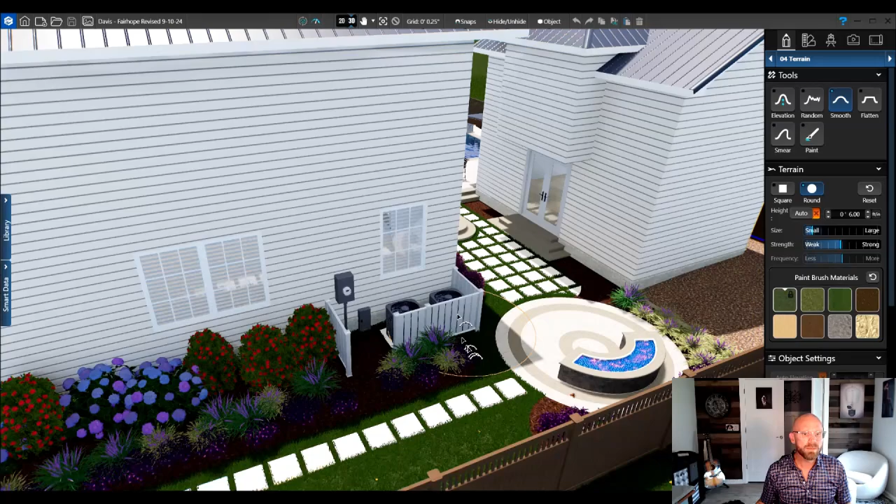Jeremy here again. I am going to show you how I would fix the terrain. I just want to make sure that you understand what that means ultimately.

So you already have these steps built here. Pulling up the terrain so that you don't have steps to come down into this area is going to cause you to lose those steps. And if you're fine with that, that's completely fine.

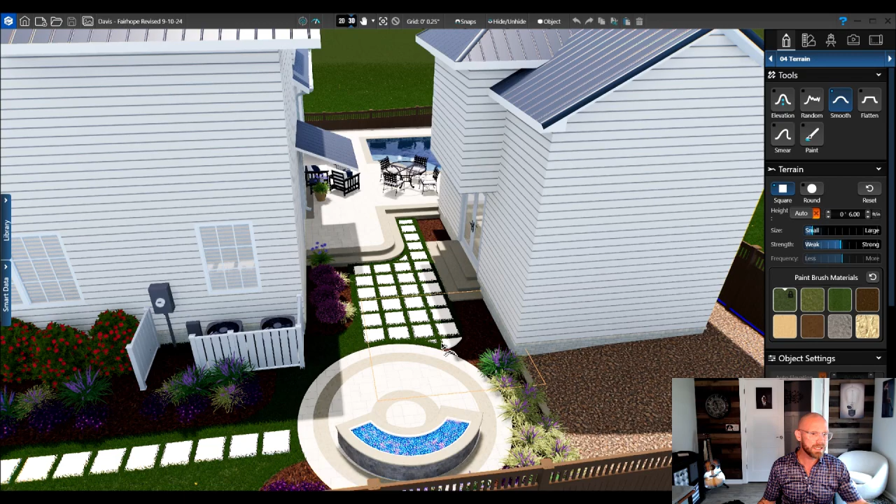But I just want to make sure that you understand what that means. Otherwise, you would have to have some weird retention wall in here, and at some point you'd still have steps coming down. So if you're okay covering up these steps, which I think are beautiful, then that's fine. I'm sure Tommy would have no problem backfilling that area and raising the elevation to match.

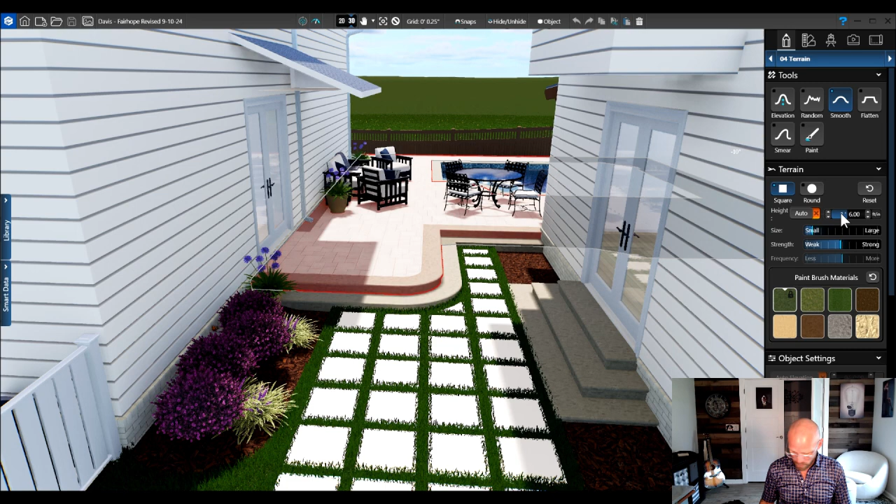So this is what I would do here. If we look at hardscapes, let's look at the elevation as 1 foot. I'm going to go back to terrain and set my terrain tool to 1 foot. And let's go a little bit bigger here. All right, so now what I'm going to do is just raise all the terrain in this area to 1 foot. All right, so there we go.

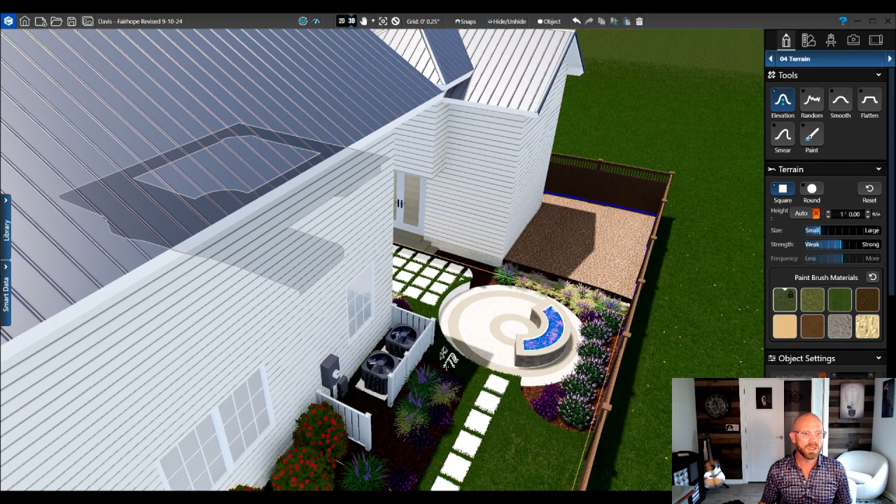And then everything will come up with it. And then this side yard will end up having to slope a bit, but we can smooth that out. So this side yard will slope down, and I'm just kind of smoothing out the terrain right now.

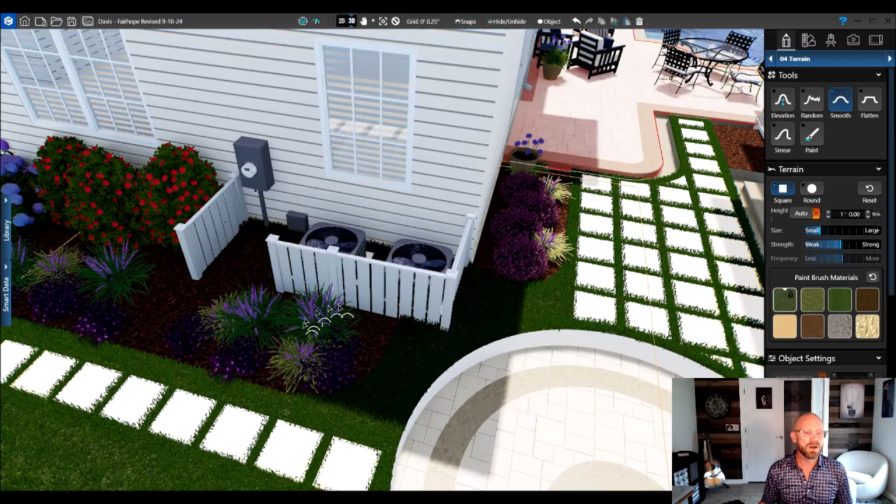The other issue is the fact that if you pull the terrain up over here, then you're going to have an issue with the air conditioning units, if that makes sense. Because we cannot change where the air conditioning units are, we can't bring those up with the changing terrain.

So now that I'm looking at this, what I'm going to have to do first of all is, you're going to have some steps over here, and I'm going to draw it right now with you kind of watching so that you understand what that means.

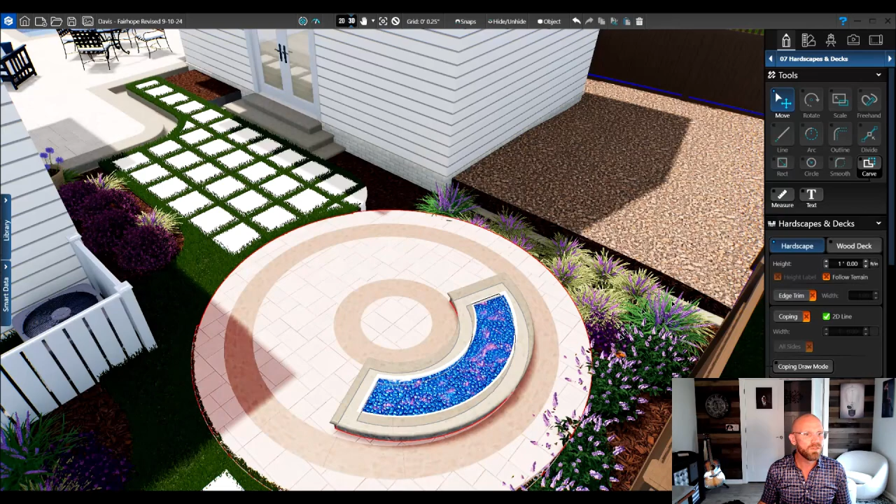So if we go hardscapes, first of all, I'm going to bring all these hardscapes up to that 1 foot elevation. I'm going to bring this up to a foot, and then all the planters, of course, are going to have to come up as well, and everything with it. So we would just follow terrain there.

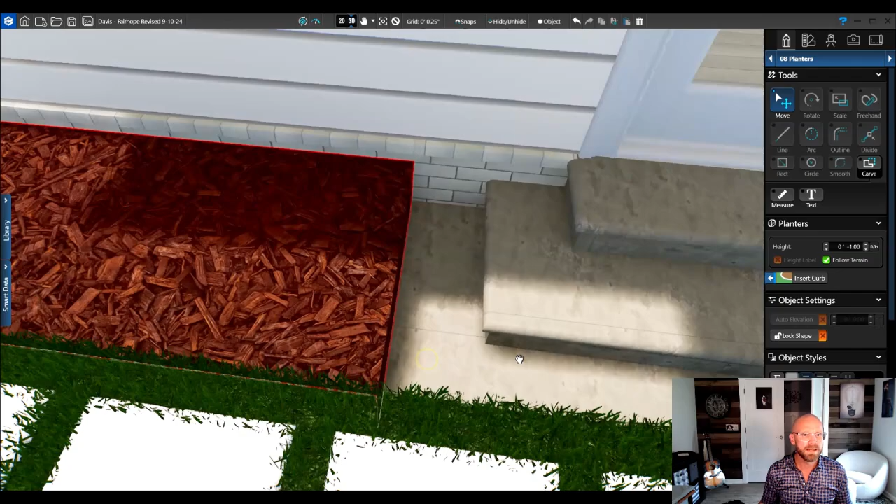Good. Let's see, are we good? Yes, that's good. Let's follow the terrain there. And then you're going to see that right now those steps are going to be buried.

So let me go ahead and pull those steps out so that that terrain can come up. There we go. I'll just leave that step there as a landing. And let's go out of 3D, back into 3D so it cleans that up. There you go. All right.

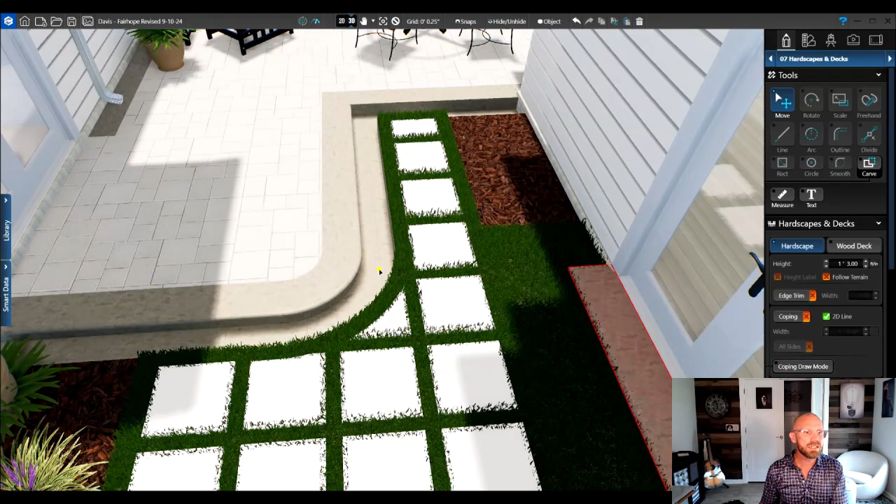Now we get rid of this step here and then cycle to 3D again. And it's going to clean up the terrain, right?

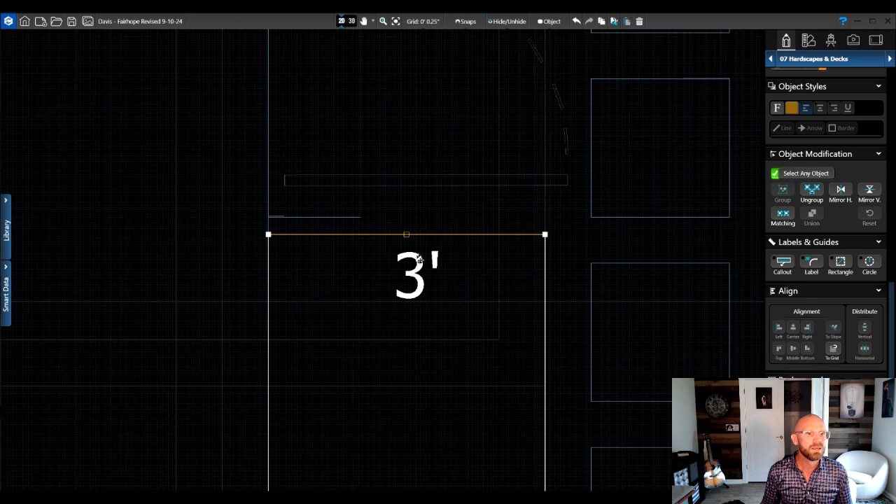Obviously, that's changing those planters, and I don't know what you guys' plan is for the planters, but let's go ahead and get rid of this drone image so that we can dial into those planters a little bit. And once again, I'm just doing this while I'm shooting this video, because it's going to be easier for you to understand.

So I'm just kind of reshaping some things here. Yep, that planter is going to have to come over here up to that step. Be precise. There we go. Make sure my snaps are good.

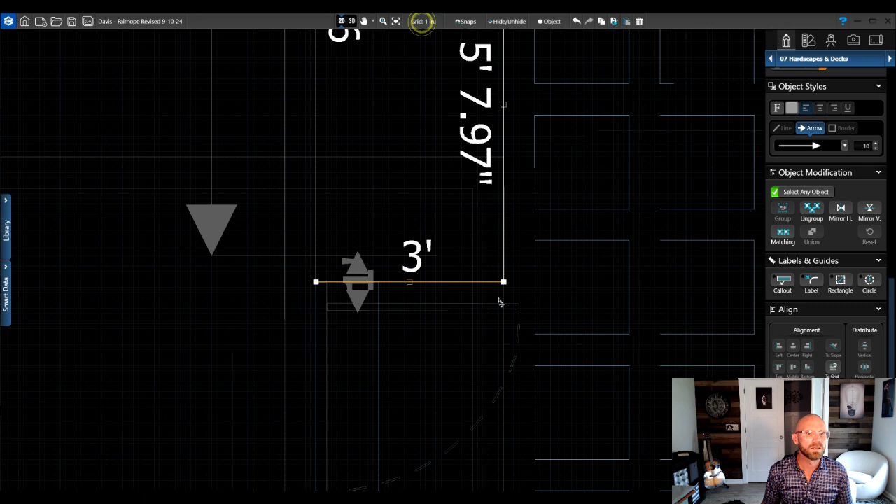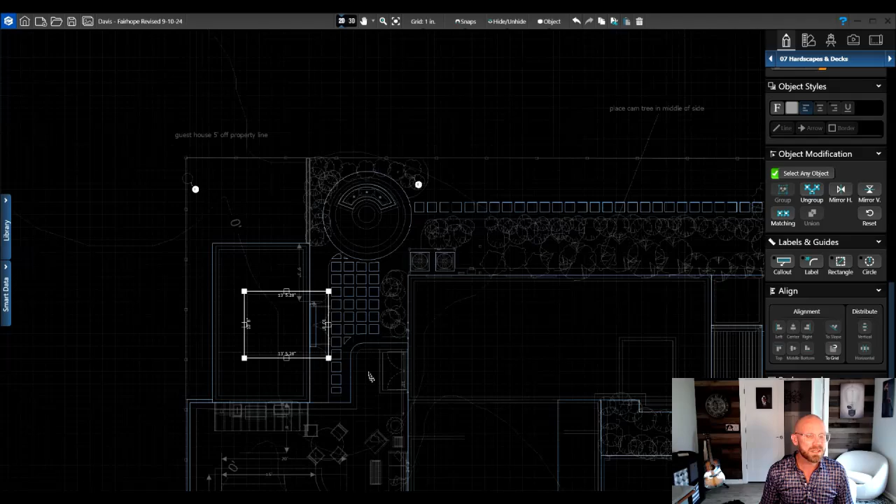All right, let's curve that planter a bit, right about there. So now we're looking at this. The problem we're going to have is if you raise the elevation over in this area, you're going to have to run a retention wall directly across from those AC units, because we cannot raise those AC units with the terrain, and then you're going to have this weird slope happening over here. I'm not sure how close to the corner of the house those AC units are—hopefully they're a little further this way. But this is how I would handle this.

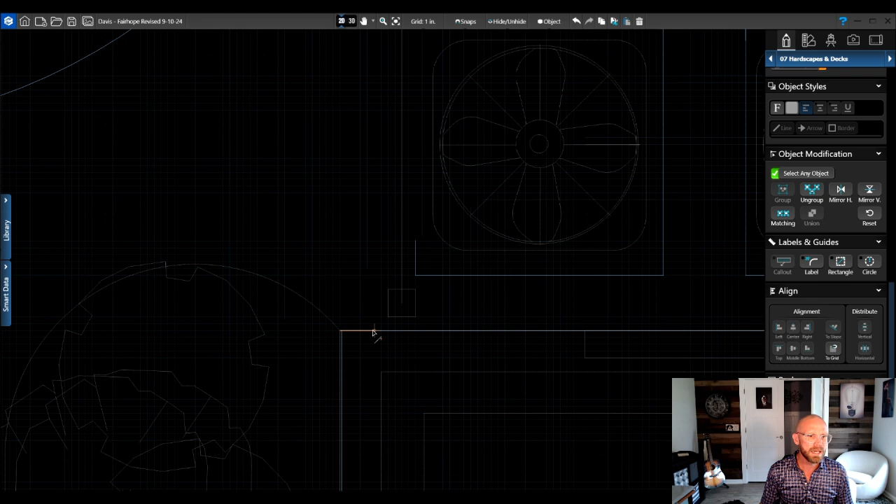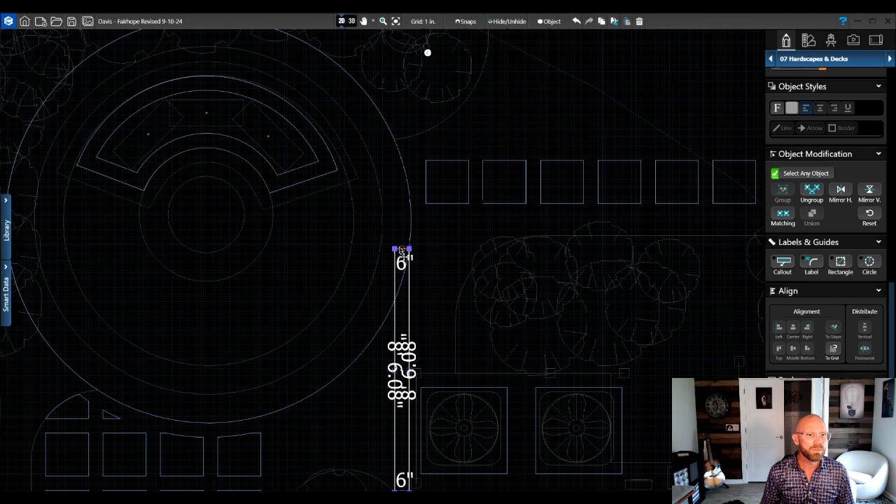I would go back to hardscapes and create a little retention wall here, and pull that along to essentially tie into that. That would hold all that dirt back, and we'd probably pull it all the way across here, and then fix this planter so that it's not going past that point.

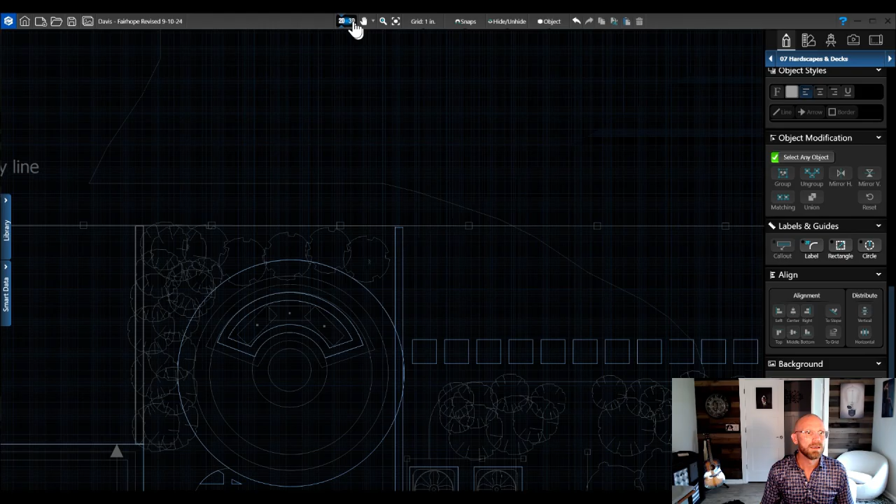There we go, get rid of some of these plants. What would happen here is, let's bring that up to where it needs to be. I'm not sure why that's so far down—we're going to go 2 feet. Or is that 18 inches? There we go, that's where we're at.

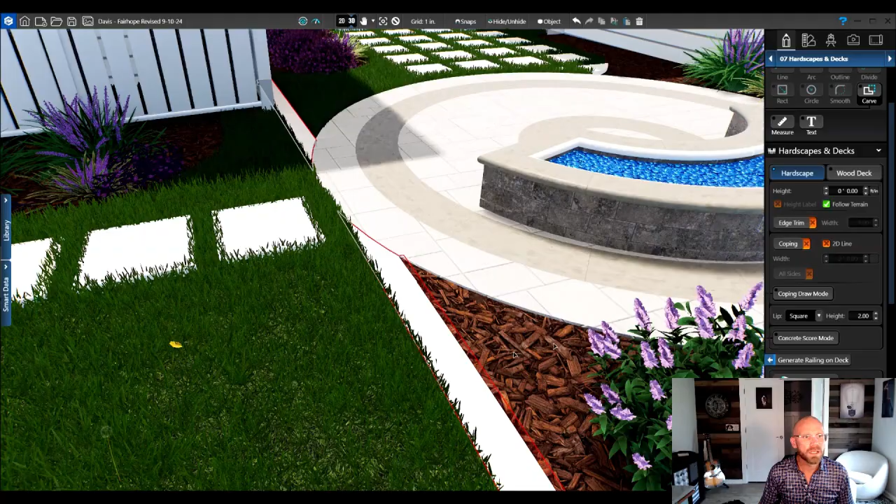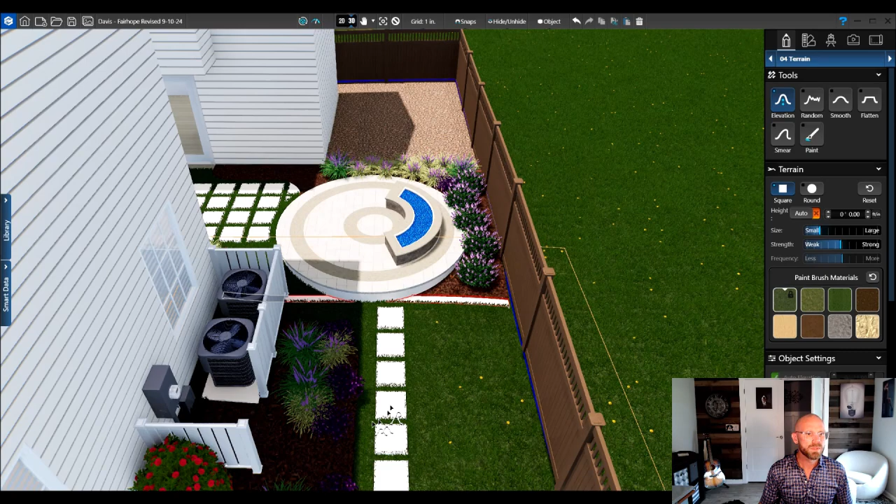Now what would happen here is you'd have some steps coming down. So let me drop the terrain in this area. We're going to go back down to 0. There we go. Terrain functions are a little tricky to work with, so what I'm going to do here is—no, we're good.

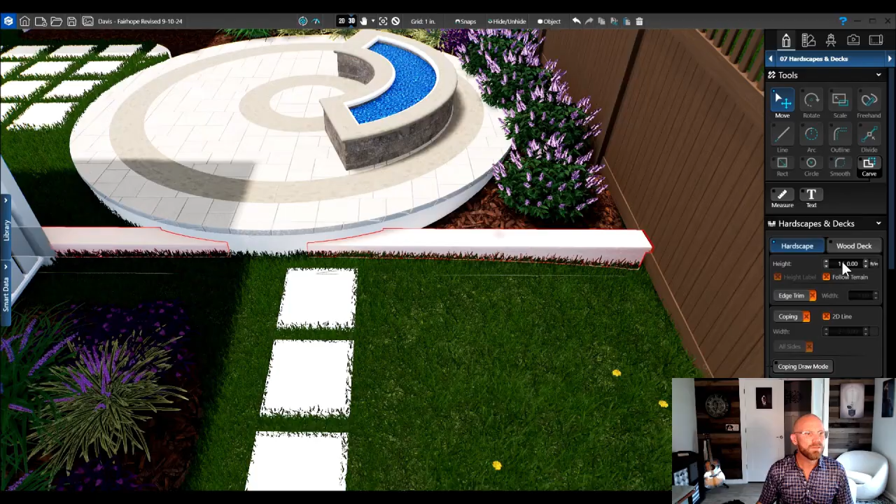All right, go back to hardscapes, fix that wall. We are not following the terrain on that. We're going to bring this up to 1 foot—no, 1 foot 6 inches. There we go. And then we'd drop the terrain here down to 0 or lower. I think it's actually going to be about -6 if I'm not mistaken. That's all going to come up here.

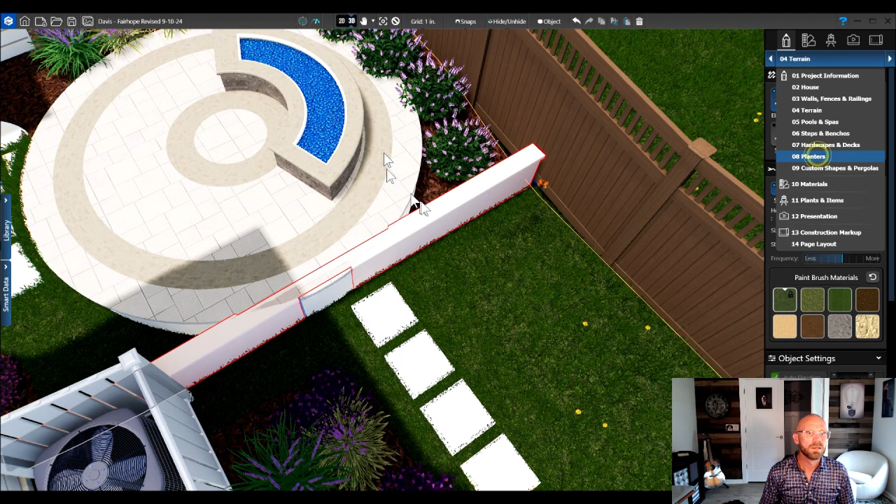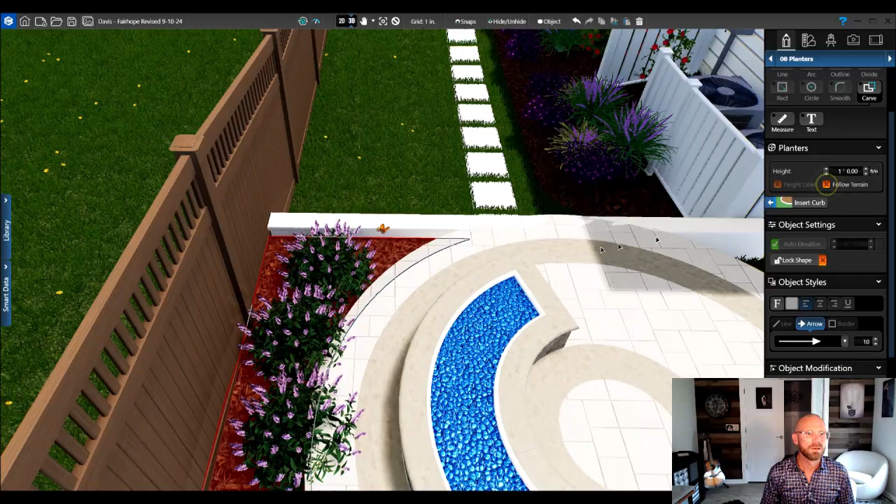These planters will come up. There we go. Make sure that all the hardscapes are not following terrain. Yep, we're good there. And 1, 2, 3, 4. There we go. Hopefully this is starting to make some sense here.

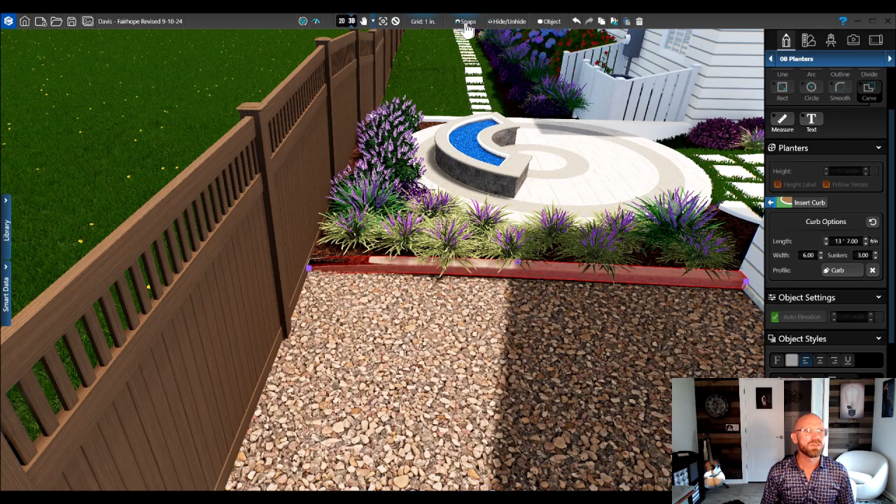I would bring all this up to level. Let's bring this here. And thanks for your patience—I just figure it's best to do this while you're watching. It'll really help you understand how all this works. And I'm going to bring that up just a bit.

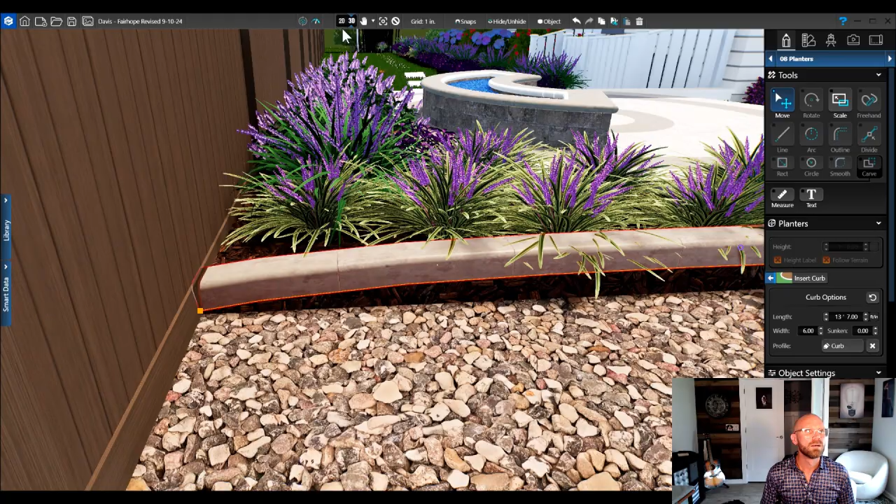Go. One, 2, 3, 4. All right, so now that's leveled out. Let's look at the back end. Now it's going to have to drop. There, all right, there we go. Okay, so now I think we're getting closer.

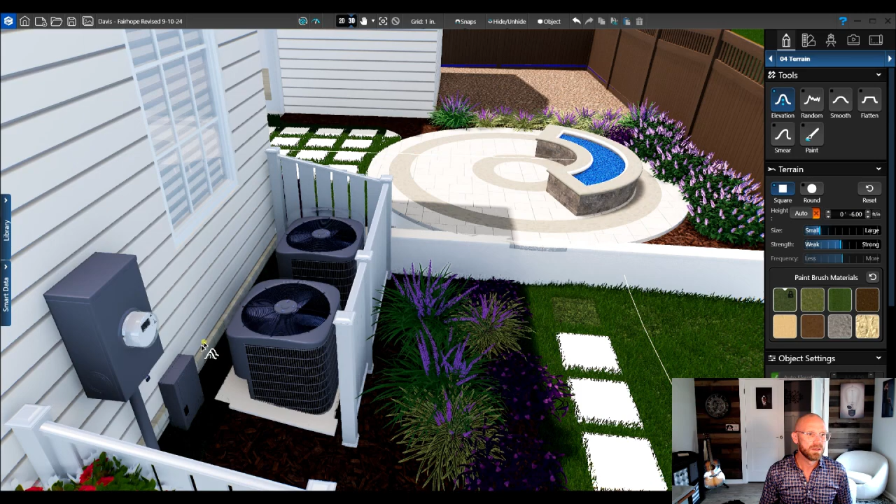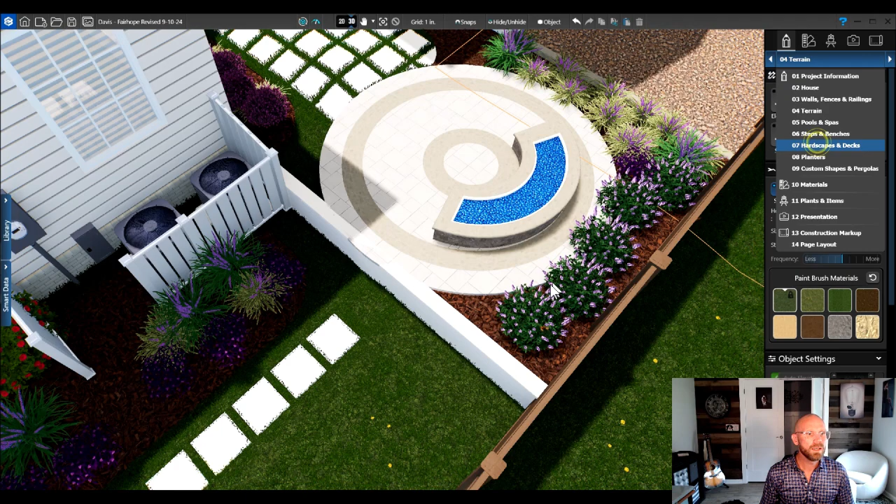Now the problem is that's going to be elevated because you can't mess with these AC units. That's not something that can be moved, at least not without an extremely high expense. So I would suggest making sure that everything stays where it's at there, leveling out most of this right down to where it's going to go down to the front yard. There we go. And then you'd be left with a couple steps here coming off of that little retention wall.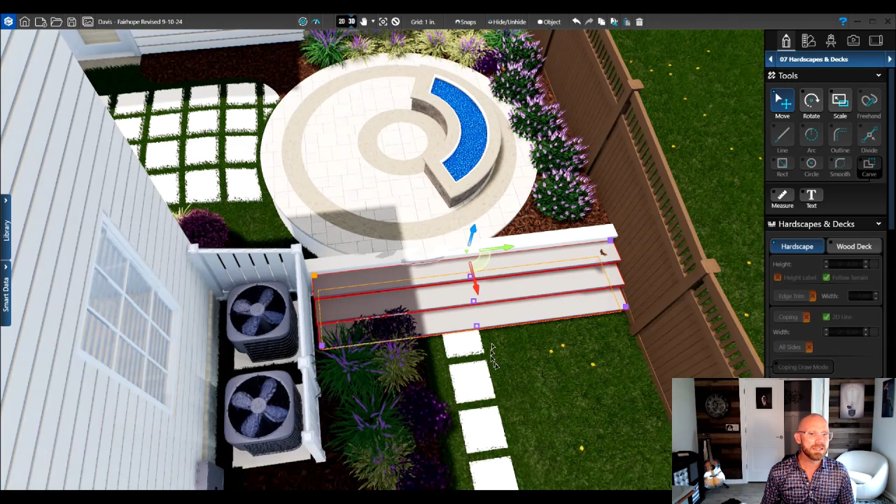And let's stretch this across—stretch this across, I'll probably just do it right here. Or maybe all the way across. You're going to have to let Tommy know what you want to do here. But this is what would be expected if we're trying to augment all the terrain in the area and make it look the way you want. So let me just change this material real quick so it's matching, otherwise you're going to see that little glitch there.

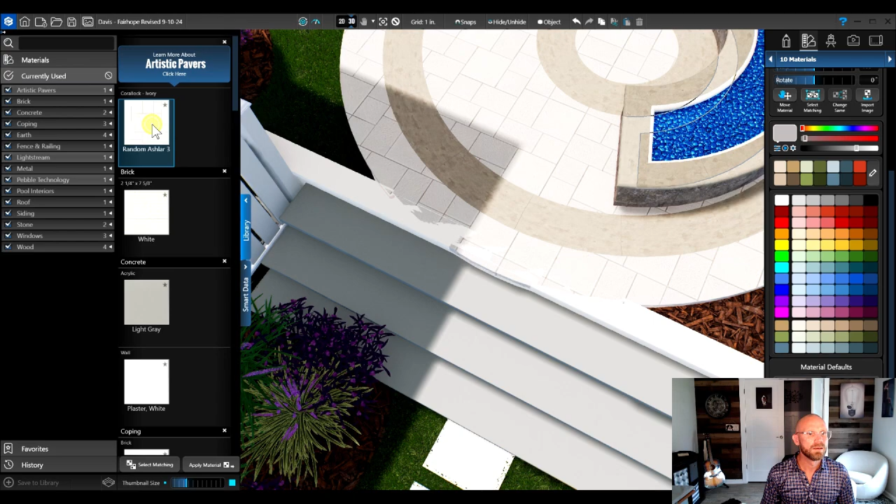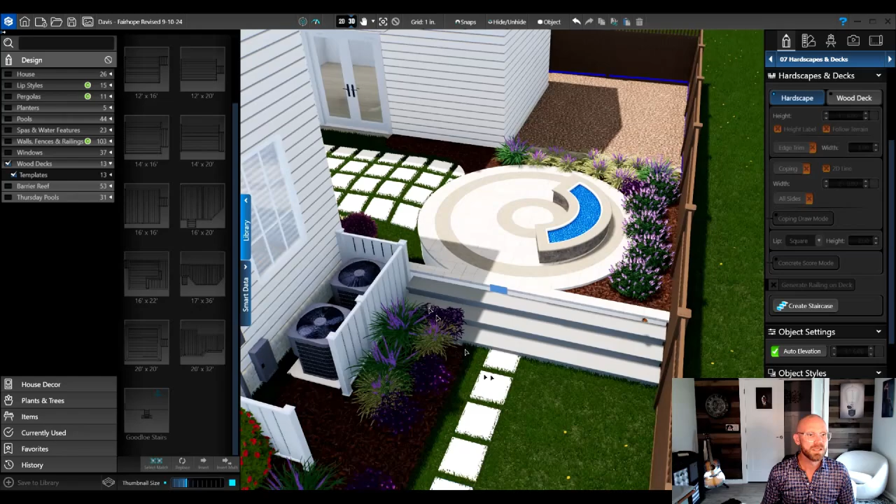So something like that—that is essentially what you would have to do if you raise that whole area. One thing is you're going to get rid of the steps for the guest house, and the other thing is you have to think about the fact that you're going to have a retention wall, because bringing in all the dirt over here is going to cause a lot of problems. Hold on, let me get my terrain back where it needs to be. Sorry, this is part of the design process—you just got to go back and forth and keep tweaking things. Here we go.

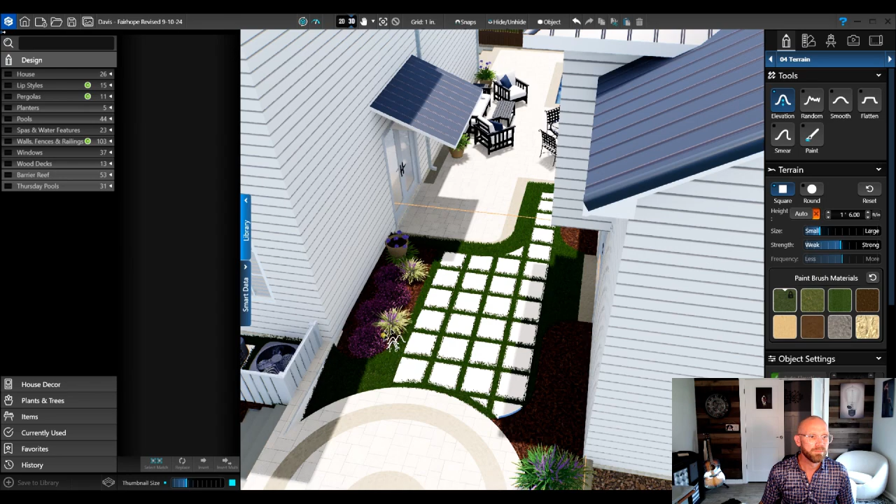And elevation. And boom, let's pull that up. There.

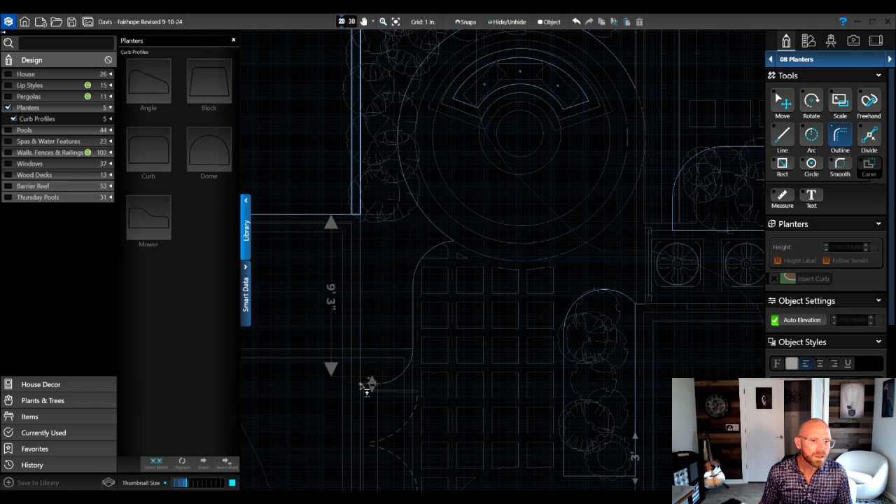One last thing, and I'll be done with this section. We're just going to go ahead and make sure that's all level. Planters, there we go. Let's do this. I'm going to trace this. We're going to go here, here, all the way through here.

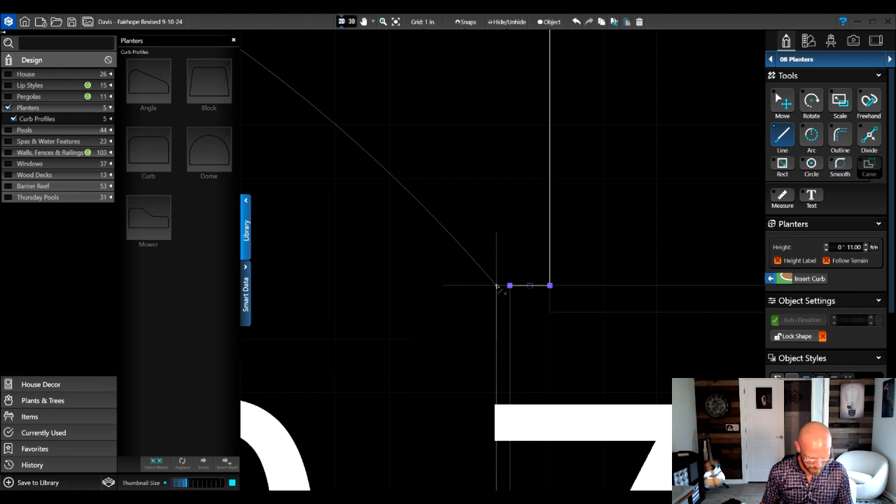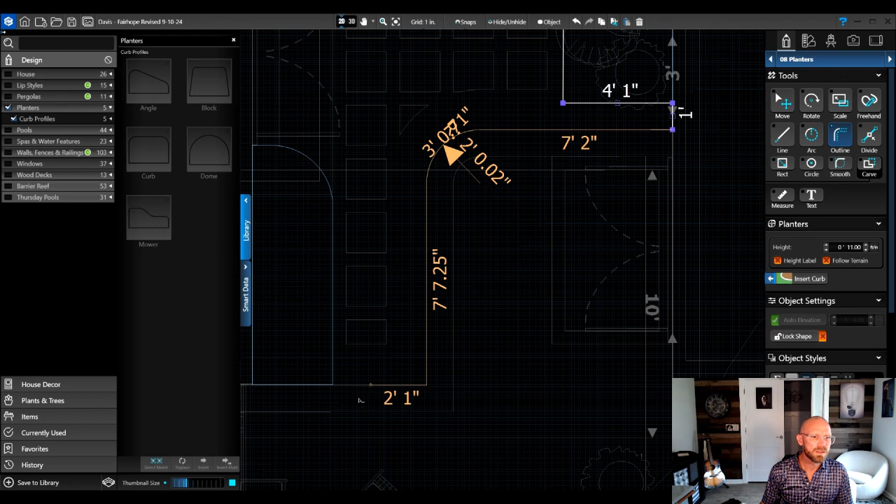Sorry, I have to really dial into this detail. All right, keep that on zero. All right, wrap that, bring this through, and just about finished. So what we're going to do is make sure that all of this is nice and level. There.

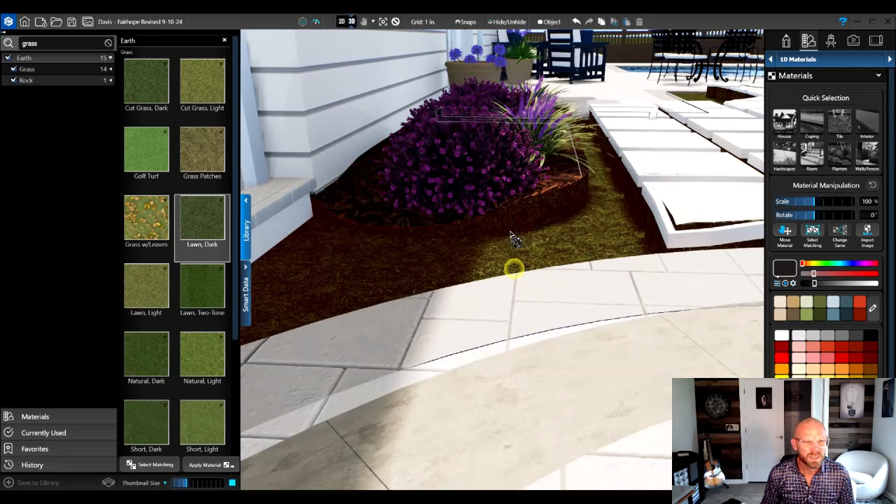All right, change this to grass. And get you back to planter. There we go. Let's raise that 1 inch. There we are. Go back to materials.

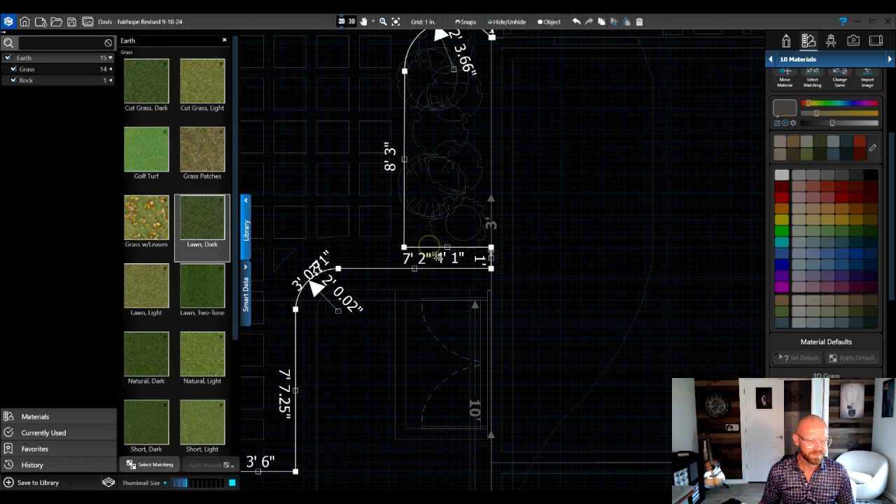Make this 3D grass, looks better. There you go. And I need to clean up that planter because we took the step away. And one more. Good. All right. There we go.

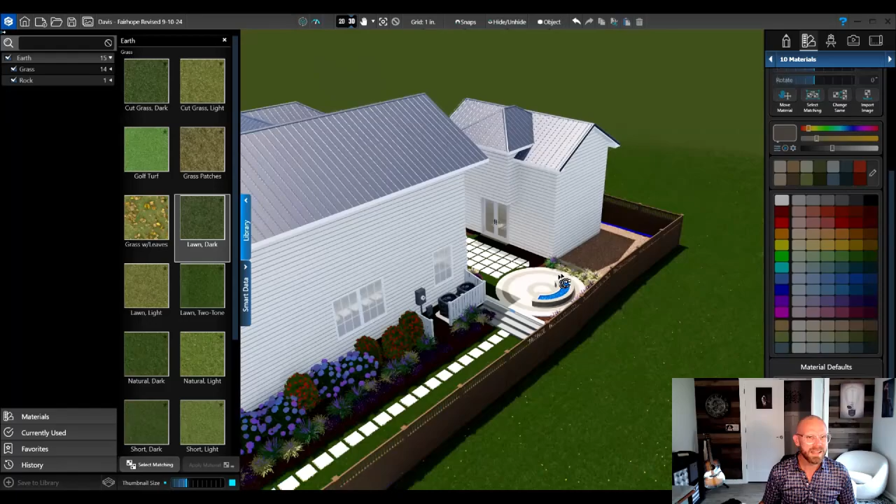Now, once again, I'm not sure exactly what you want to do with the planters back in there. I'm going to leave that up to you and Jerry Ann. I know that she said she had some changes she had to do to the design, but that's what it would take to elevate this whole backyard area to one level so you don't have any steps. And I hope that makes sense.

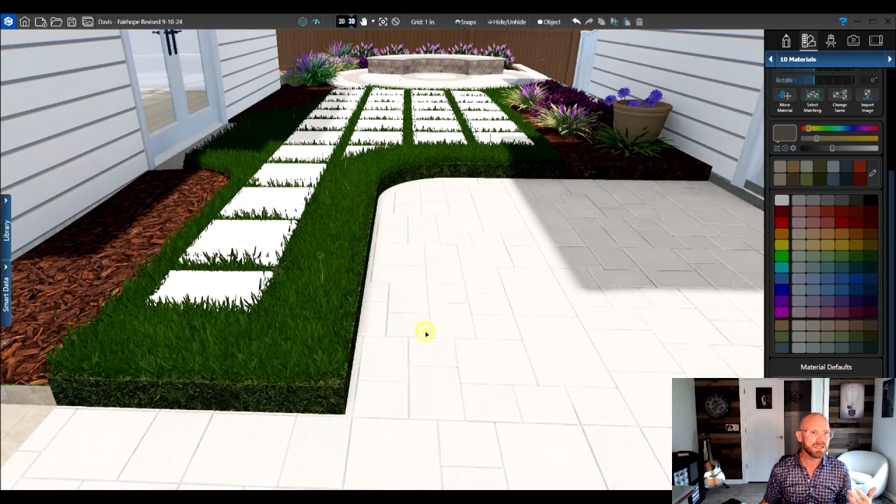Of course, we're happy to do it. I just want to make sure that you understand that that means covering up the steps that you already have there at the guest house. And I think it's a good solution. I'm all for it, of course, but I just want to make sure that you understand exactly what that means. So this has to go down. Let's go back to where we need to be. So planter, that's going to be one foot. One, two.

But you can see how changing the terrain is somewhat complex. It gets a little tricky, and we need to make sure that our hardscapes are where they need to be. Yeah, that's good. And one more little adjustment.

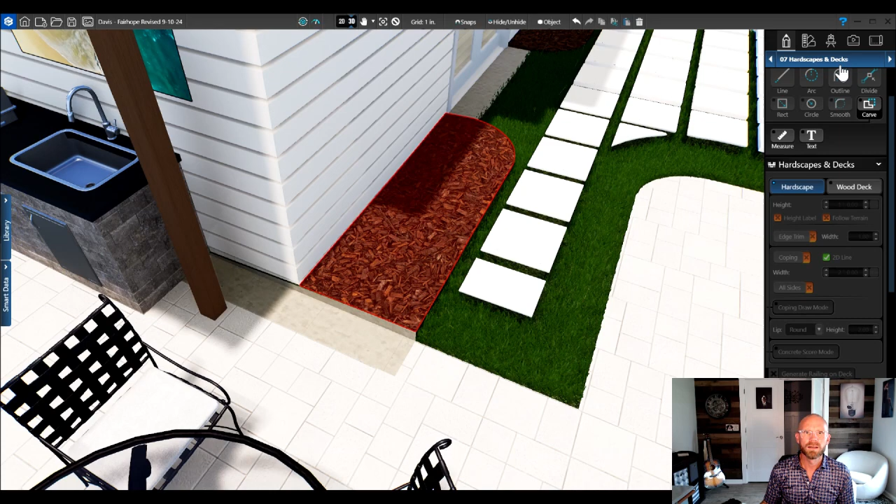Let's look at one thing here. And I'll clean up everything here because you're going to have all kinds of stuff now that need to be changed because of changing the elevation, which is fine. It just takes a little bit of time.

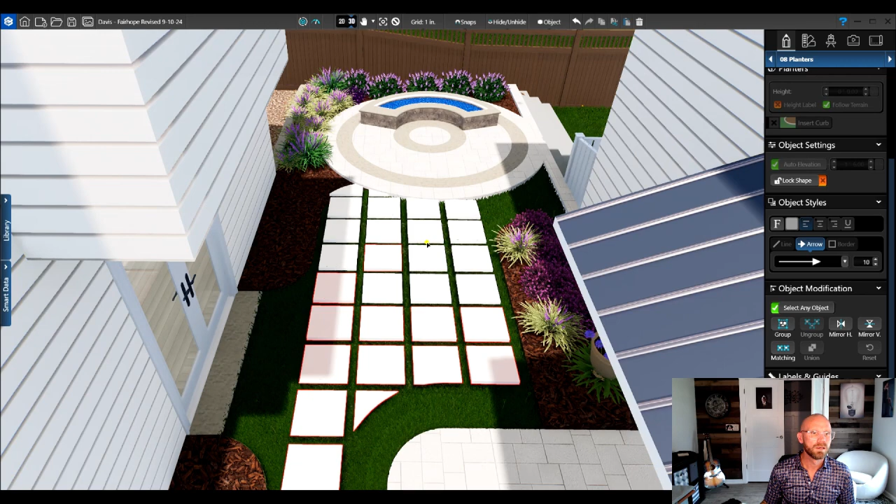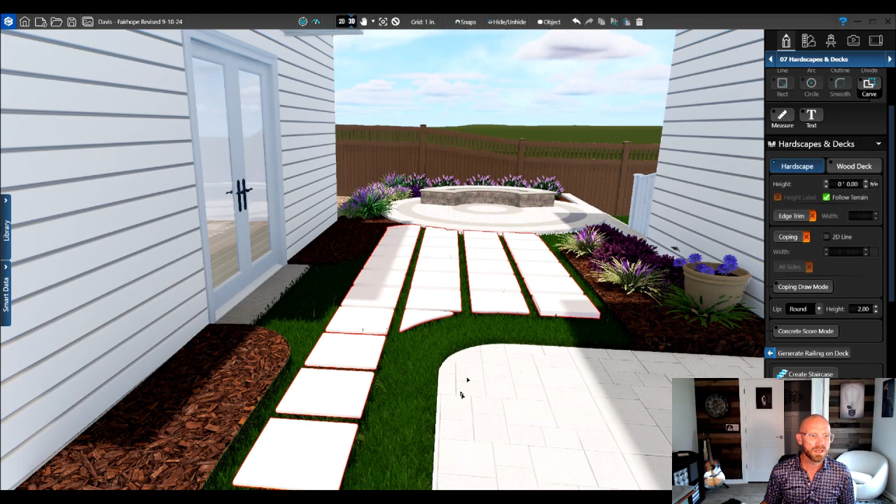And keep in mind, Jerry Ann and Tommy only use this program very sparingly. They don't use it enough to be as quick at changes as me, of course. So they do know how to use this programming and can do the landscaping and so on and so forth. So I want to make sure that we are getting everything in there the way it's supposed to be. There we go.

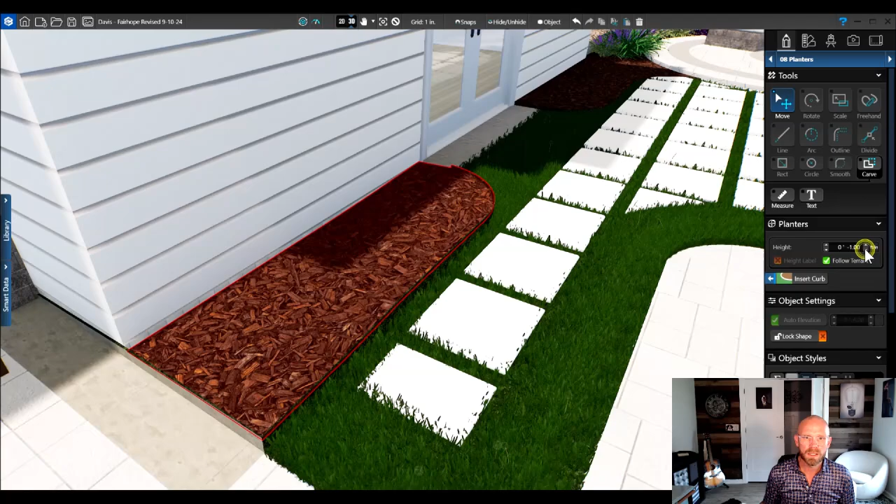Good. All right. But I'll continue to clean this up a little bit, and that way we'll be ready to really take a good look at everything once we're together. I'm going to go ahead and drop that planter and get back to 3D and see what's going on here. We got a couple little artifacts in there that are driving me nuts, so let me fix that real quick. Boom. Let's go to custom grid. There we go.

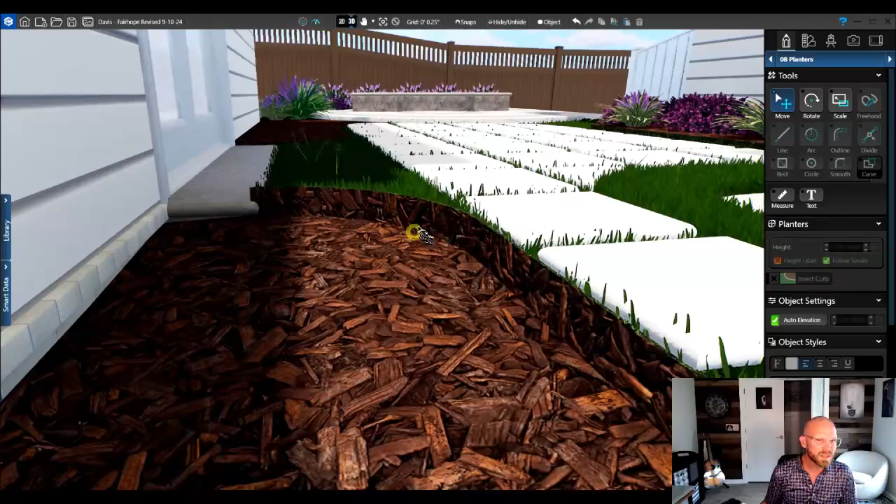And you'll have to ignore these little artifacts that are popping up. It's just sometimes there's little things with the program that cause it to do some funny things, but that's all level, and that's going to give you a good idea of what that space is going to look like if you elevate everything the way you'd like.